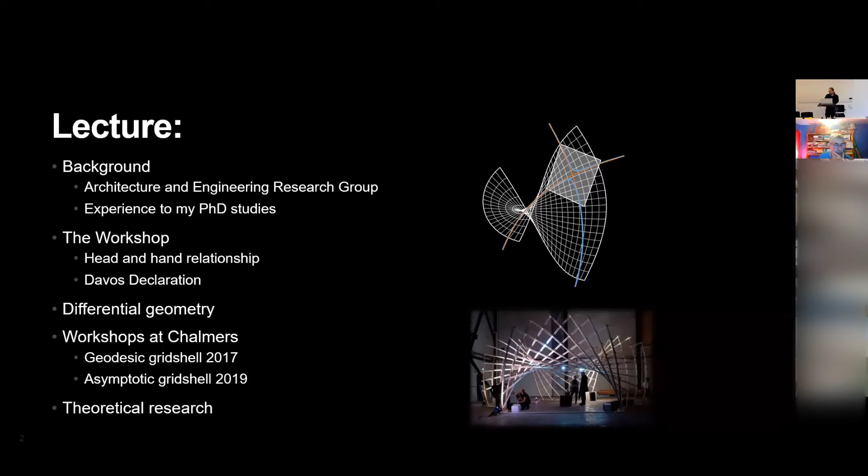So, part of the architecture and engineering research group here at Chalmers, it's a group consisting of architects, engineers, and also Peter, who is actually an artist. So it's really this mixed group of knowledge and cultures, in a sense. And as Allan said, Chris Williams is my main supervisor, and I also have Mats Ander and Claes Mondin as my co-supervisors.

Geometry is a very big part of our group. We've been host of Smart Geometry in 2016, and also the Advances in Architectural Geometry, AAG, in 2018. As you probably know at this stage, Chris Williams worked with Ian Liddell, for instance, on the Mannheim Multihalle a couple of years ago, and is also known for the British Museum Court Roof. So there's a lot about the connection between geometry and structural behavior and so on.

The reason I started to become interested in this was I did an internship at Buro Happold between my bachelor's and my master's, in the Smart Solutions group at that time.

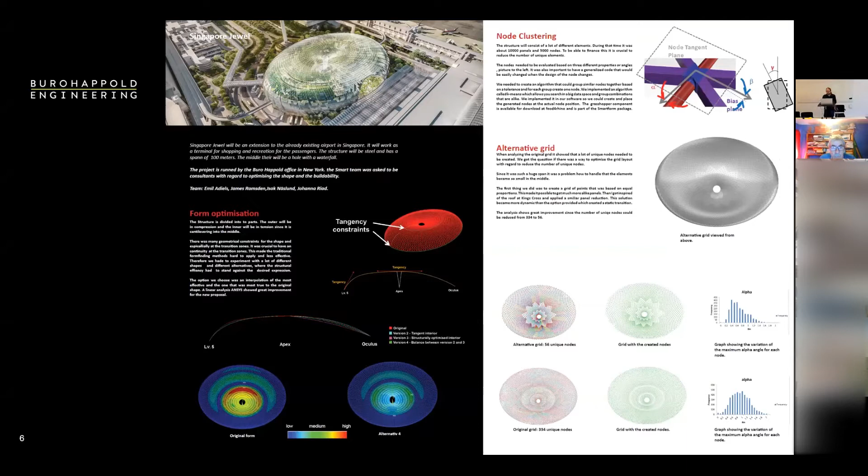So we worked a lot with geometry and projects like the Singapore Jewel. It was form optimization and also about fabrication or production, developing little tools like node clustering, together with other people like Isak and Emma Poulsen, which you will see more in the workshops later.

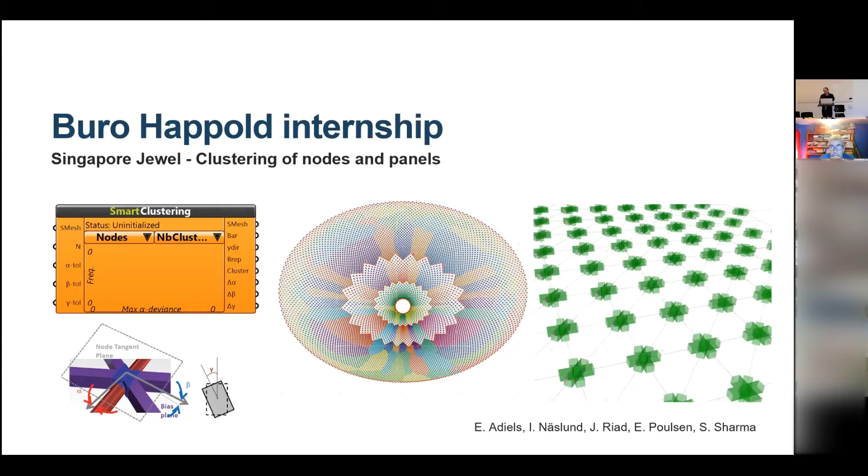There I became interested in the connection between form and patterns and forces, though I didn't fully get everything at that time, and I'm still trying to learn all that. I think it was through these kinds of projects I became interested to continue with that when I came back to Chalmers for my master's. That was an important period, or year.

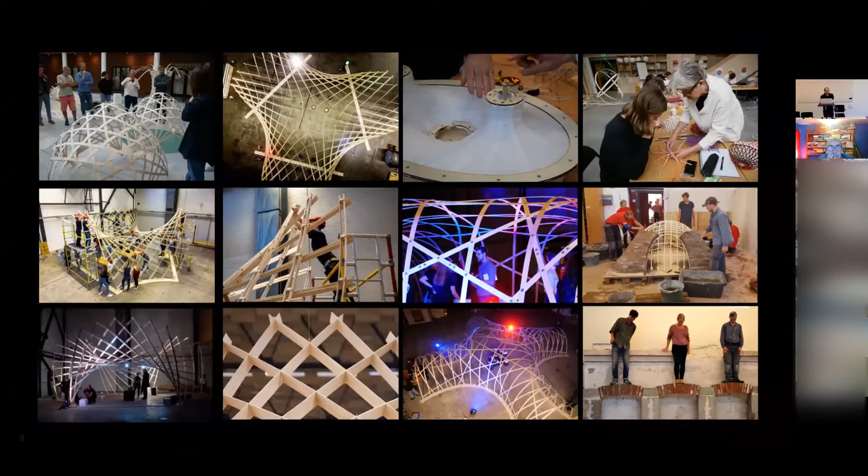The main thing I'm going to talk about is these kinds of workshops. What I mean by that, since it can have many meanings, is when you have a certain amount of time where you meet, have some sort of objective, and try to combine both digital modeling and building things, smaller or bigger models. I'll focus on that later, on the kind of design process we've been doing, because I'm not an expert in design process, but maybe showing how we've been doing it can be interesting to you.

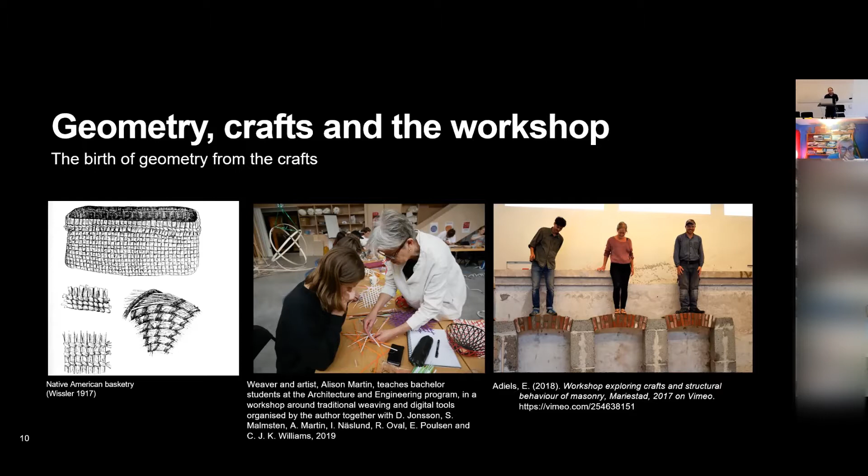But really, what's the connection between geometry and the workshop? It's difficult, but many do believe, and I can also believe, that geometry comes from the crafts. If you think about a weaver or bricklayer, the form and pattern is very much related for structural reasons, and that was probably more evident for craftsmen and craftswomen before we could have the math or theory to describe it, because that's only from about 300-400 years ago that we started talking about the kind of theory we have today. So there's a great connection there.

And also when we talk about these workshops, it's about the head and hands relationship, which has been very important. I can really recommend this book, The Hand by Frank Wilson, who I think is a neurologist, which tries to describe this marriage between the head and the hand, how it's actually very important for our learning historically, and how we are biologically trained to work with both the hand and the head.

There are different types of books I can recommend if you want to read more about craftsmanship, and also about the workshops, like Richard Sennett's, describing how we have been learning in the workshop, not least by learning from each other. All these books could be interesting to understand this. The second book, Together, is maybe even more important today when we sit so isolated at home and so on.

All this about craftsmanship is also related to the Davos Declaration. Not many people have heard about it, but it's a declaration signed by the EU Ministers of Culture, trying to produce documents defining sustainable building culture, where they focus on the process and a holistic view of the design and design process and its effects, also emphasizing craftsmanship - not that it should be conservative, but the connection between local knowledge and new digital tools.

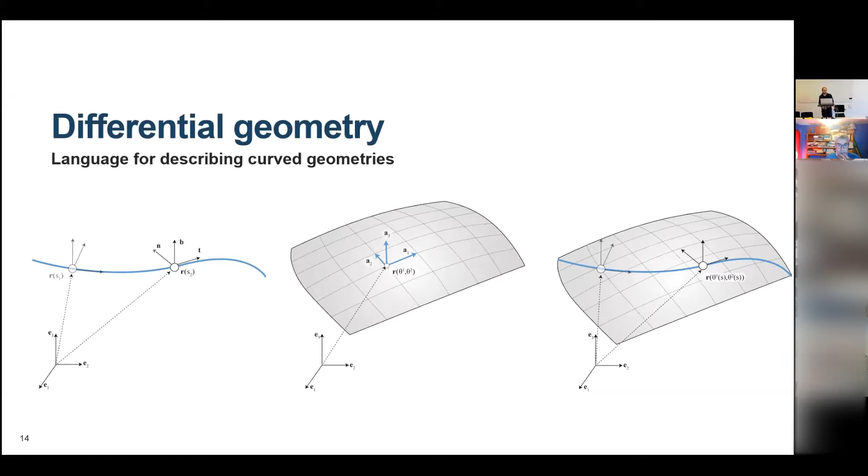Differential geometry is basically a language for describing curved geometries, at least the way I use it. You can basically say it's about describing space curves, surfaces, and then also curves on surfaces.

Space curves, you get this coordinate system where you have the tangent, which you probably know, but also the curve normal and the binormal. You can use this to describe different properties of the curve: the curvature, which is kappa, and the torsion, which is tau. That's really useful when you try to understand the properties of these curves.

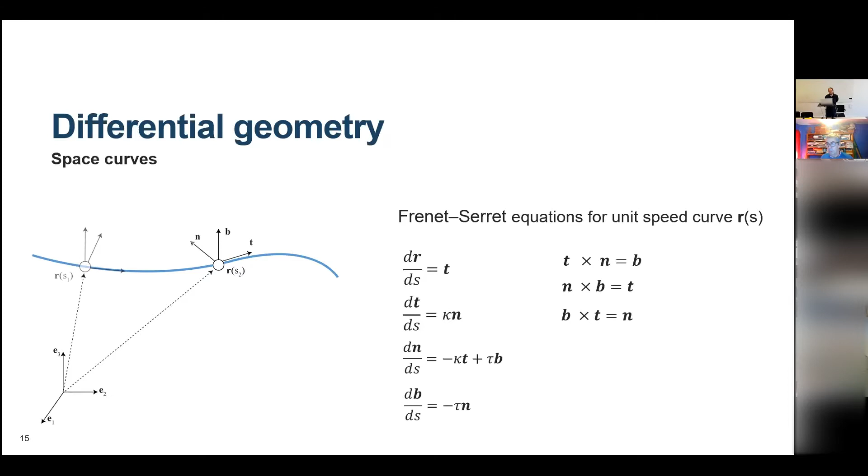The same thing can be done for surfaces. It gets a bit more complicated when working with surfaces, obviously. The difficult thing with working on curved surfaces is that the base vectors, your coordinate system, continuously change. So that's A1 and A2, which are in the plane of the surface, and A3, which is normal.

But we can use this to also describe the properties of these surfaces. So the metric tensor describes the lengths and angles in this grid that you see. And the B alpha beta are the components of the normal curvature tensor, which is how much this bends in relation to the normal to the surface. You can basically use this to describe the pattern.

You might think you could decide this however you want, but you can't, unfortunately, because you have the Gauss-Codazzi equations, which are three equations that describe - it's basically a compatibility equation, making everything, how the A's and the B's actually fit together, so it actually becomes a surface in the end.

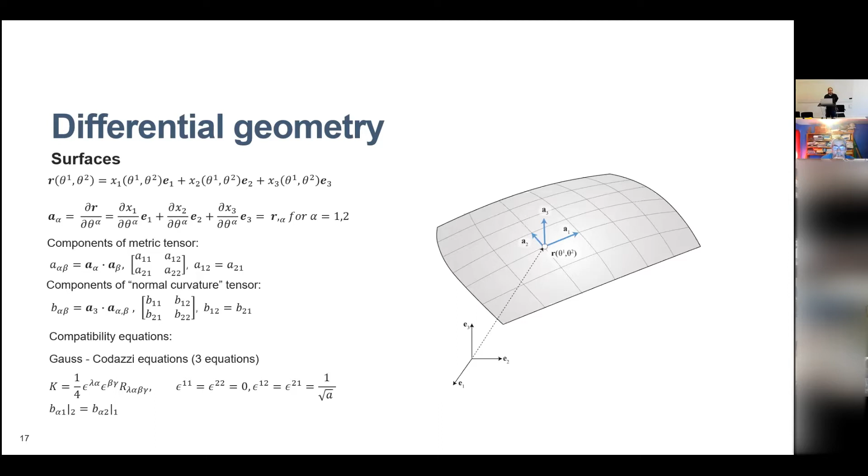The first one, the Gauss equation, is basically describing if you would actually walk on a surface. So it's describing the intrinsic property - basically if you lived on this surface, you could know that you live on a curved surface, without seeing it.

If you would point in a direction and walk with this vector in the same direction, and then come back at the same point, you would basically have an angle, and then you would know that you live on a curved surface without actually seeing it.

And the last one, with the B alpha and the covariant derivative, is the Codazzi equation, which also has to do with everything fitting together. So these are the main equations that you need to at least know about when working with these kinds of things.

What is really important then - you've probably heard about the Gaussian curvature. There are many different types of curvature, but the Gaussian curvature is a measure of surface curvature.

We can describe different properties: if it's positive, that's due to having two positive principal curvatures, you could say - that's K1 and K2, and I'll come to that. But you can also describe it with B11, B alpha beta, and A alpha beta. That's how they connect.

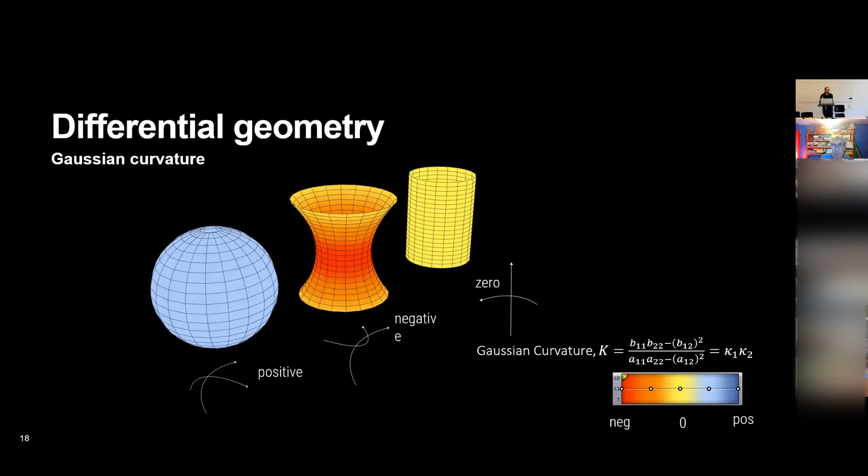The more Gaussian curvature, the more difficult it would be to build something. Usually if you have a gridding problem, you want a low Gaussian curvature in a sense. But for structural reasons, it could be really good to have more curvature.

The principal curvatures are the maximum curvature in the normal direction. So if you think about the normal and how much each of these curves, that's the direction you would know - it's in a sense related to principal stresses, but it only has to do with the normal. So when we have curves on surfaces, we can always relate them to the surface normal.

If we take these principal curvatures and add them together, divided by 2, we get the mean curvature. And if you have zero mean curvature, then it's a minimal surface.

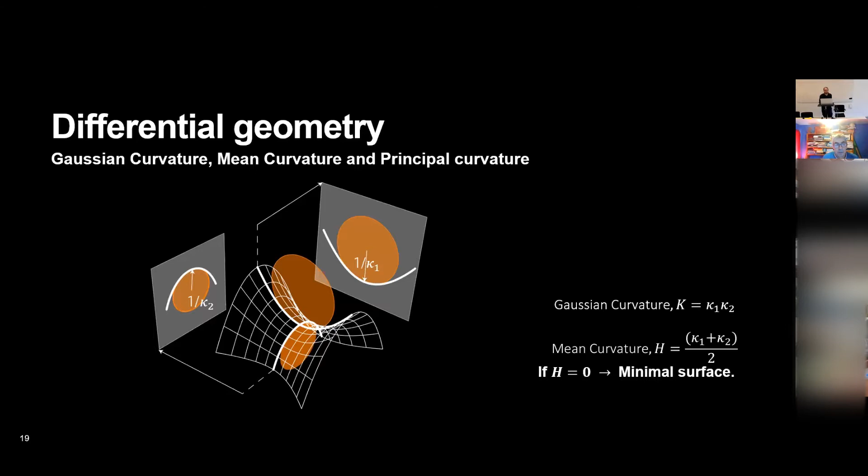So why is this good to know? We can use an example. If you see this Enneper surface, it has this description. Using all the equations we saw previously, we can calculate the A11s, A22, A12, and the Bs. You can see that you have zero mean curvature, the B12 is zero, and the A12 is zero. So basically you know you have a principal curvature parameterization. It's a minimal surface, so you know all these angles are at 90 degrees, and you also know that you have flat panels everywhere.

So it could be good to know about a way to describe these surfaces.

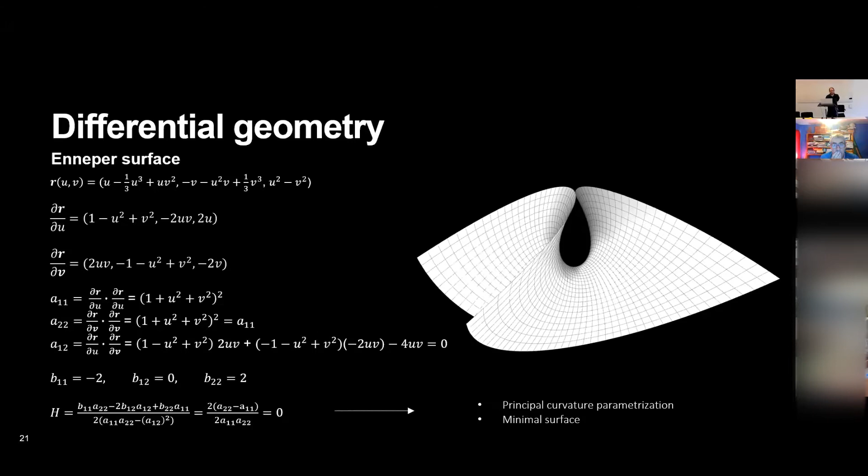But we also have curves on surfaces, and similar to the principal curvature directions, we relate its curvature to the surface. The equations I showed previously about curvature, when on the surface, can actually be divided into what is called the normal curvature and the geodesic curvature. The geodesic curvature is when it bends in the surface plane, and the normal curvature is when you project the curvature vector onto the normal and see how much component there is.

If you have zero geodesic curvature, then you would have a geodesic. That's a special type of curve that only bends in relation to the normal, and it's also locally, at least, the shortest distance between two points. So you can see it in both ways.

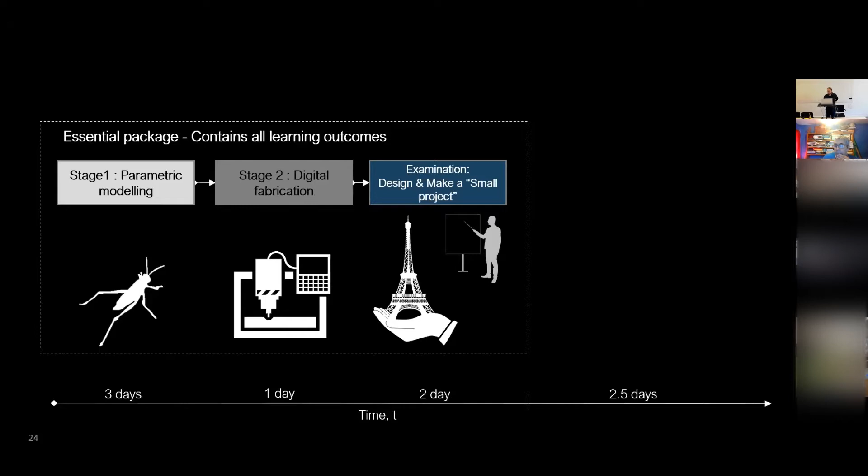That's all fine, but we wondered what happens when you get a bigger project—you can't really build it on your desk. You have to think about dividing all the pieces, the erection process, the production process, and so on. So we thought, why not have a workshop to summarize this, since we managed to fit all the requirements into 6 packed days.

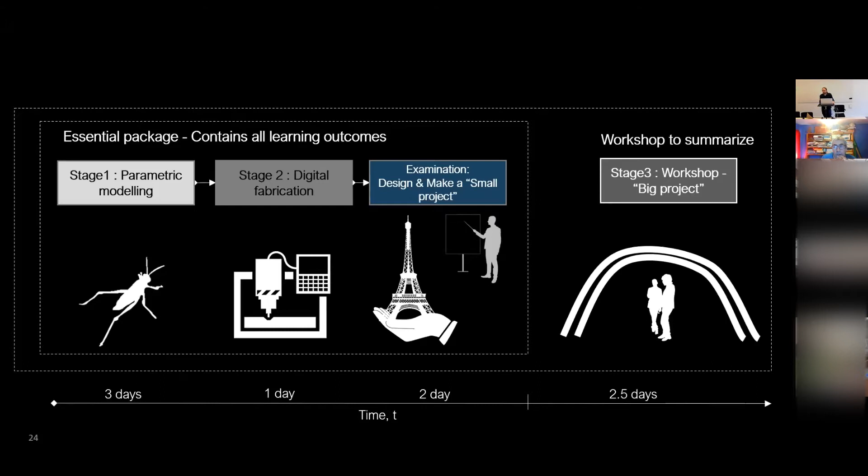So we basically had 2.5 days to do something fun and be a bit free. We thought about it—we know we want to do a space in December, so not outdoors, we want an indoor pavilion of some sort. It's going to be a space for this Christmas holiday event, where they have a book release and so on. So we thought about what kind of things we'd like to incorporate.

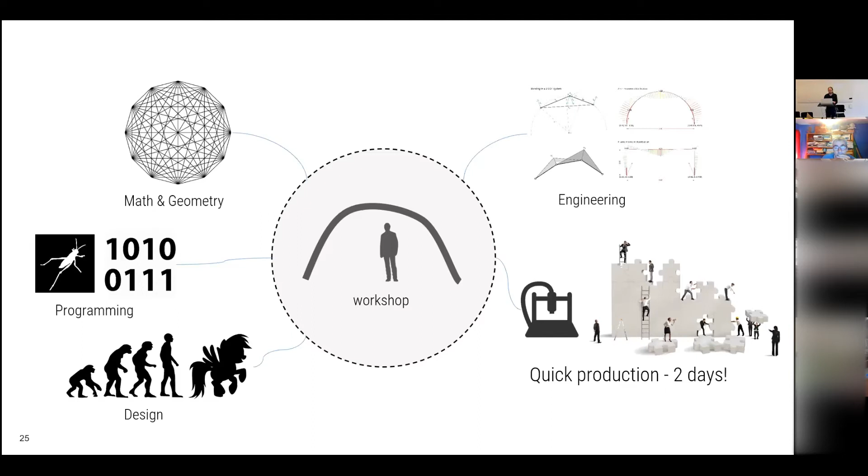We wanted to relate it back to the course, the kind of programming work we'd been doing, with some nice design since they study architecture too. But mainly, we had to produce everything in just 2 days with our students, from boards coming in to having some sort of structure. We don't have a great budget—we could only get a certain amount of plywood boards, screws, and a limited number of tools. So cutting them into straight flats was the most economical way, which meant we had to keep things simple.

We had these limitations, but still had to make something exciting. The methodology we used was to think about different geometrical concepts and then go into a design process where, as a team, we considered the form, the space, the limitations, the manufacturing process, analysis, and so on. Then we moved into producing everything and ran the experiments with our students.

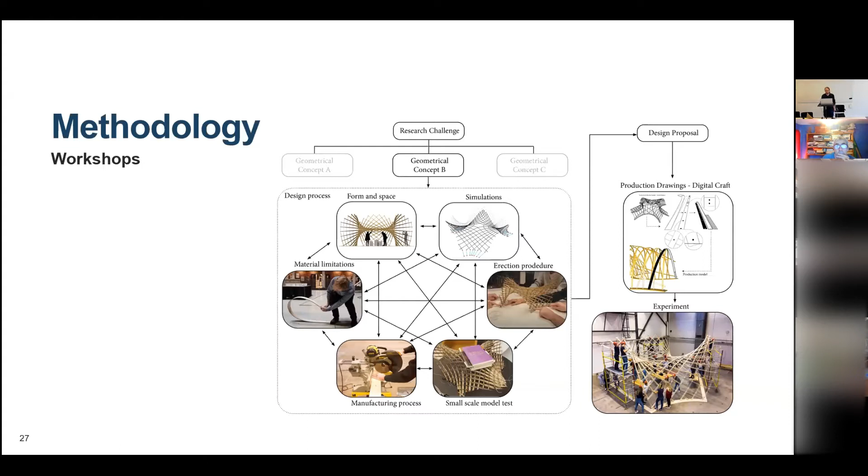This is the couple of people who have been involved, so it's not only me that has been doing this. It's me and Isaac Näslund, who was the teacher. I'm the course responsible, but Isaac was also a teacher. It's basically a design team that's been different people different years, and we try to actually package it so the students understand what we're doing, not just something they don't really understand. We try to make it into some theory and application so they can learn from it.

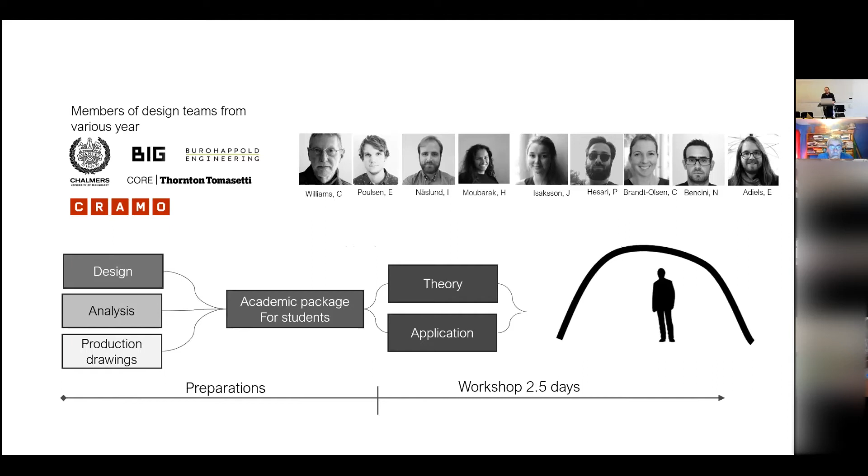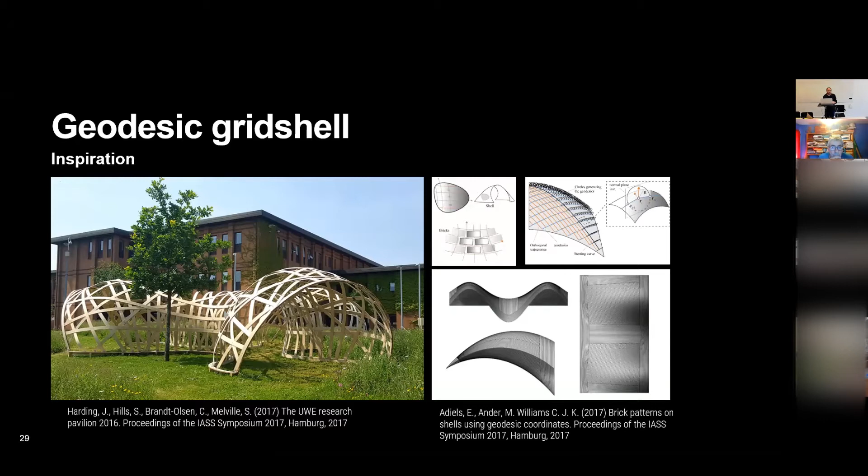The first year was inspired by different projects like this geodesic gridshell one, and we had worked a bit with geodesics on a paper we did, so we knew a bit about that. That's why we thought it would be good.

Going back to these geodesics, there are different ways to think about it. You can think about it as having 2 fixed points, and you find the closest path between them—imagine a rubber band or a cord tightened between these 2 points, you get the closest distance. Or you can think about having a piece of tape or ribbon that you start in one starting point and direction, then you see where this goes. That's thinking about it as having zero geodesic curvature in a sense.

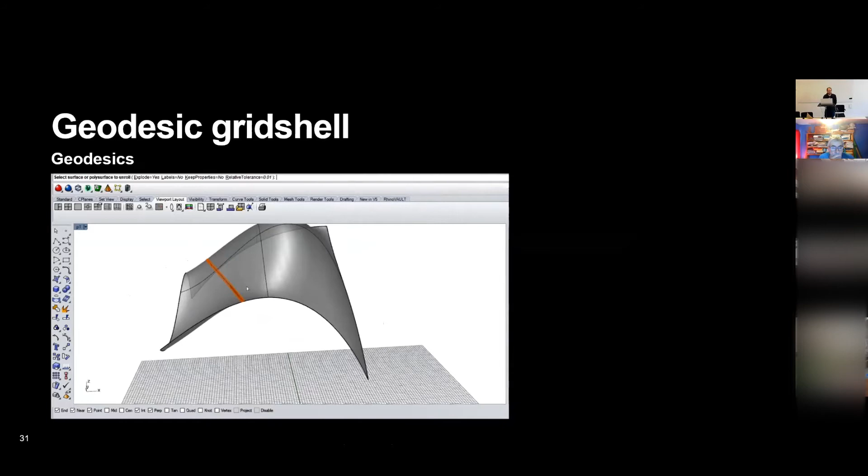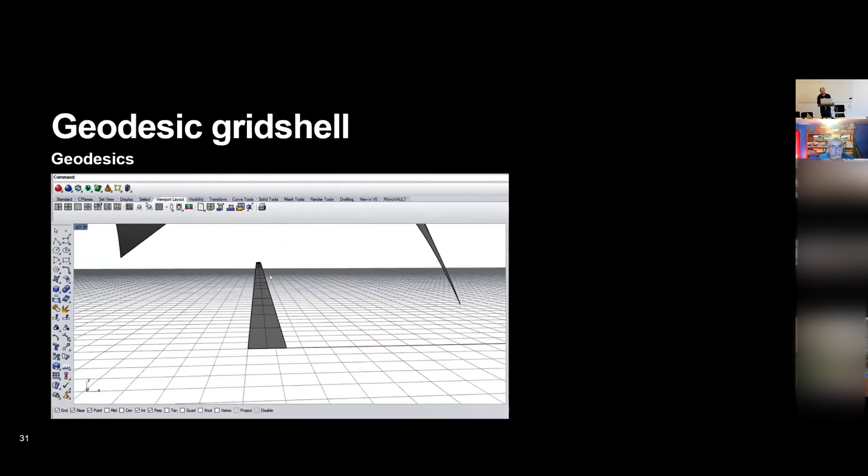Every time we have a theory or something like that, we test it out. You probably learned Rhino now or something like that—just implement it, some sort of script, then check. So yeah, that looks pretty straight, that seems to be working, that's good, let's go with this.

Then it's also about understanding the limitations—how much can we bend this, how much can we twist it, how are we going to do the connections, and so on. So basically starting by just building random stuff, and you check, oh this is tight, we can do it. So we know that.

Then we went into seeing what kind of shapes, because it's going to be a space, right? So we did some options, but we found out that it didn't really work because we didn't know how to design it, build it in a sense. It wouldn't really work because we're only working with mathematical surfaces—it's not actually real, so you have to always think about that. It's going to be a real structure, some things will happen.

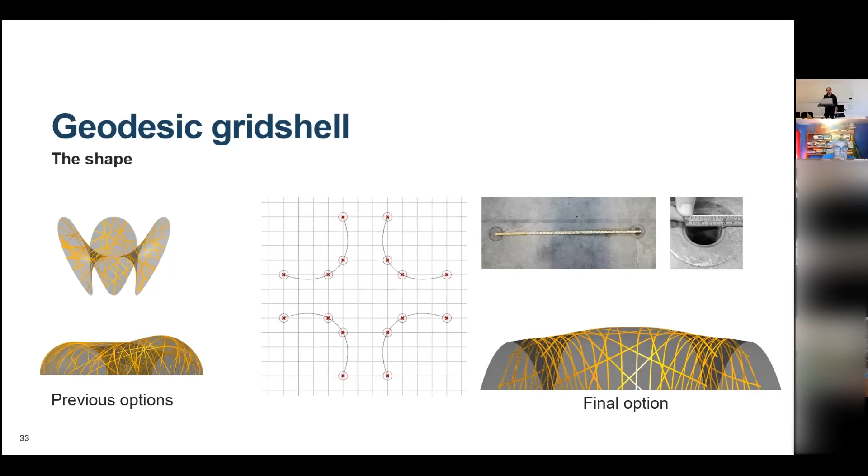We actually realized symmetry would be really nice, and we had this floor where we're going to build it with a 1 by 1 meter grid. So we just took the base kind of curve, and we tried to match it at these points and found the surface that worked that way.

The good thing about geodesics, as you know, is you can decide how the pattern is going to be, depending on the starting point and direction. We tried to find something that would look interesting but still have a lot of symmetry—I think every element here is repeated 8 times, which helps speed up the process a lot during the workshop.

We could also think about the erection sequence in the meantime—what kind of things should we start with. They can start from 4 different points and come to the middle. We really try to imagine the workshop beforehand, in your computer, before you're there.

We did everything in Grasshopper—it's not very pretty here, I'm sorry, it's an old picture, but just to show that we did everything so that the students would get the script and could basically build it themselves, going into all the things we've been doing as teachers in the design process.

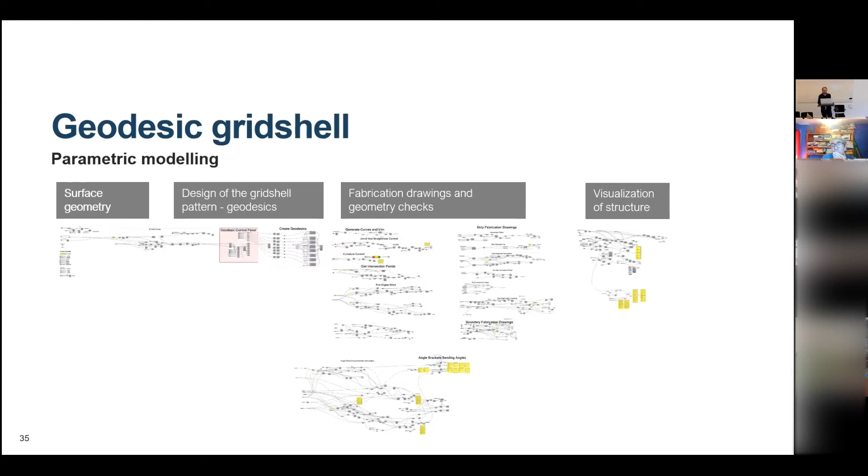A lot of it is just fabrication drawings and geometry checks. So we could basically tell the students, in your small projects, you could stop at the design of the gridshell, the geodesics, but everything else is used for checking, doing all the fabrication drawings.

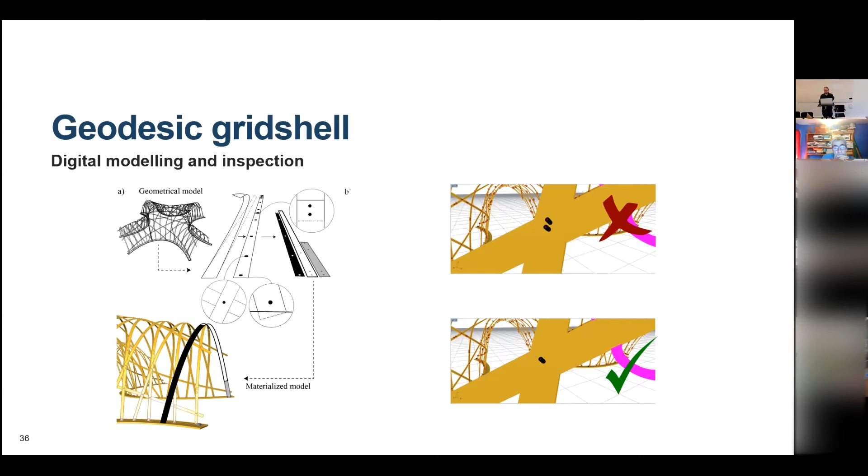The way we did it was we first did this geometrical model, and then unrolled all the laths and did all the holes and all the cutting, and divided them up, and then built it up again. The advantage was that you could check these kind of things. Since every lath has its own bolts, we could see if they didn't match, there was something wrong, so we could basically use it as a way to check beforehand that everything would fit together.

And these were all the drawings that we did. It's all the laths, for the laths, since we had to repeat it 8 times. And that's for the boundary. We only needed one CNC to run it, which saved time.

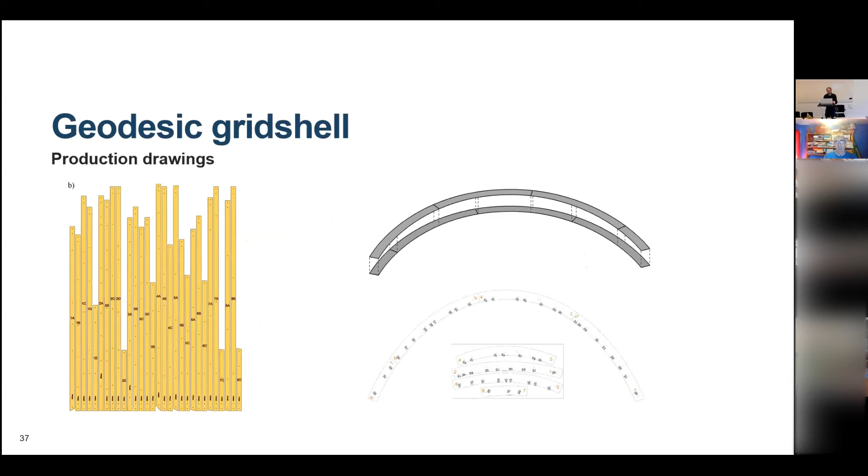We were very confident, from when we did the bending test, that everything would work. We could bend it quite a lot, but Emil Paulsen did actually a bit of a quick analysis beforehand, because we were kind of stressed at this point as well, since we maybe had like one week to prepare this. We were like, yeah, it's fine, but we actually realized we overutilized it a bit. We kind of thought we'll be fine, it's not that big of a curvature, but we'll see - we might regret this.

And now you will see the workshop, how it went, from these 2 days.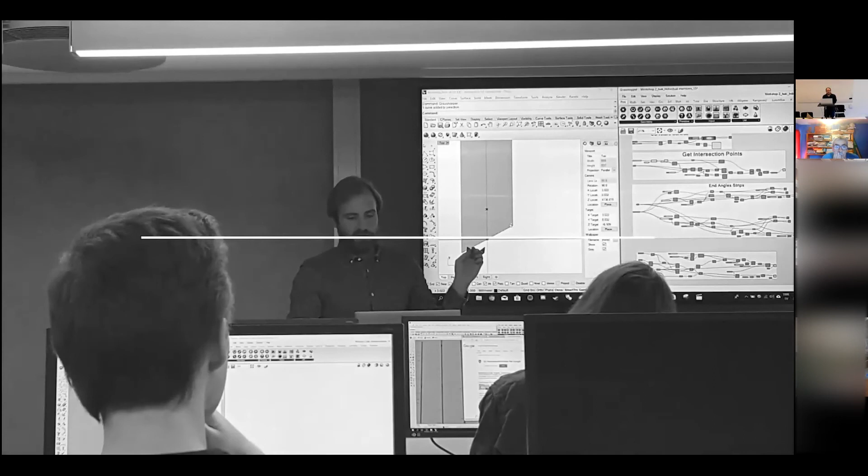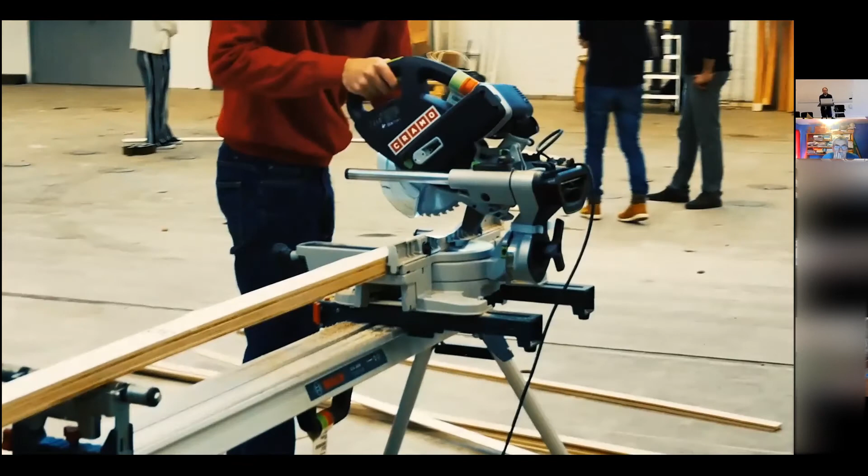So this is Isaac showing the students the scripts. Now they cut up the boards, they come as 6mm plywood, and these are the paper templates that we printed out, and they had to use them. We have, didn't mention it, but we have like 40 students.

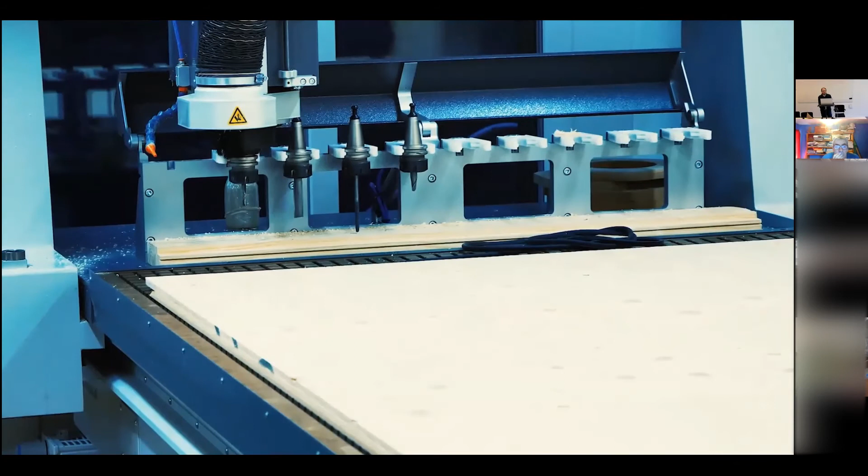So the fastest way was actually using all these simple tools. We could have done it with the CNC, obviously, but we wouldn't have had time. But we made the base plates there, like you see here. And marking is good.

You can kind of see this teamwork, getting together, and a lot of dancing and stuff like that. They had the music on during the day, and that's also one thing that's important - to have fun during these workshops.

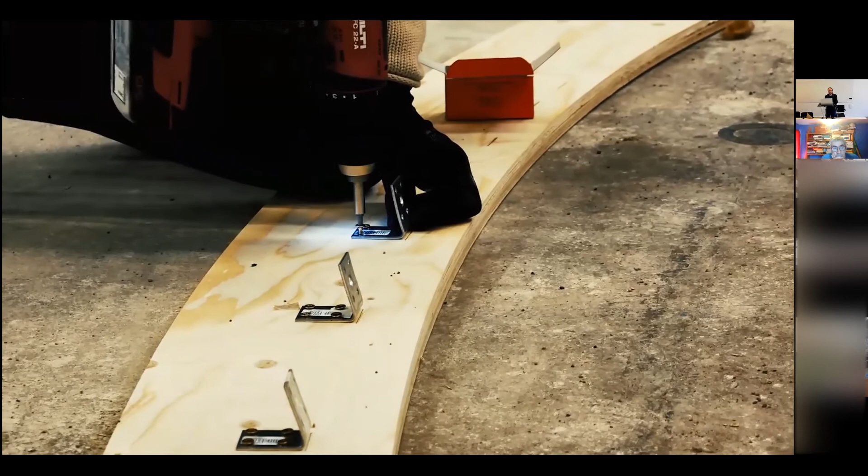Then it was assembly time. We actually pre-drilled all the holes, and we were a bit stupid because we had the exact diameter of the drill and the bolts, so we didn't have any tolerance, which was just stupid. I had to apply some force sometimes to get it together.

And here you can see the teamwork, more dancing. Time lapse. I think it's really important to see that they're having fun.

We were a bit skeptical - we were afraid that they would find it really boring since we had done so much in advance, but everyone actually got different assignments. We didn't tell them how to do things, so they actually divided themselves up and so on. We gave them the freedom to solve the issues themselves from the drawings and so on. So it became, I think, a collective ownership in the end, which was our intention. It was not our thing, it was everyone who was involved.

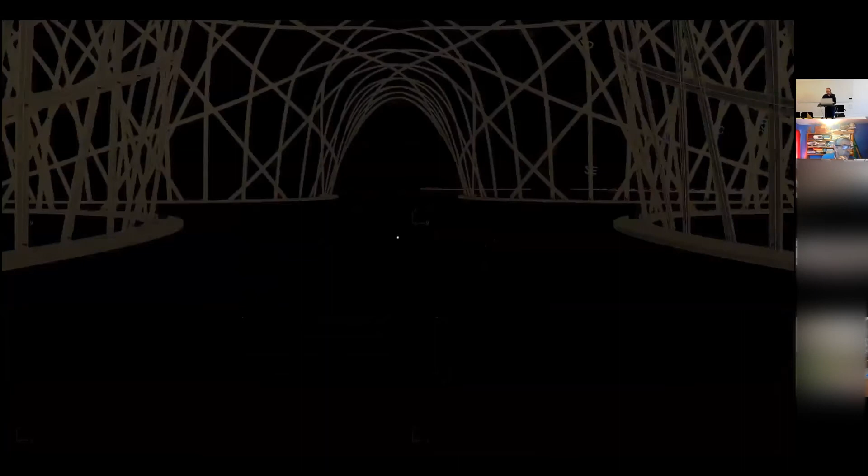We also got a bit of breakage at one point, since I think we had a knot in one place and so on, but overall I think it looked really nice. I think we managed to get it to look quite natural - that's the result in the end, and the details worked pretty nice.

But then we were in the same situation the year after, and the year after that. So this is 2019, and we were still thinking about what to do. Do you want to do the same thing? That's a bit boring. So I'm going to talk about this asymptotic gridshell instead.

And the inspiration came from Eike Schling and Jonas Schikore, who did this pavilion. And we also did a previous one in 2018, which for some reasons you will see had some issues.

There's a bit of difference and some relation between the asymptotics and the geodesics. The asymptotics, I think the name comes from two curves that don't really meet. You might remember this from math. If you took a plane and intersected the surface, you would get these blue lines and they wouldn't really meet. But if you get closer and closer, trying to touch it with a smaller part, you'd get this orange line, which is almost touching, but not really. That's an approximation of the asymptotic directions.

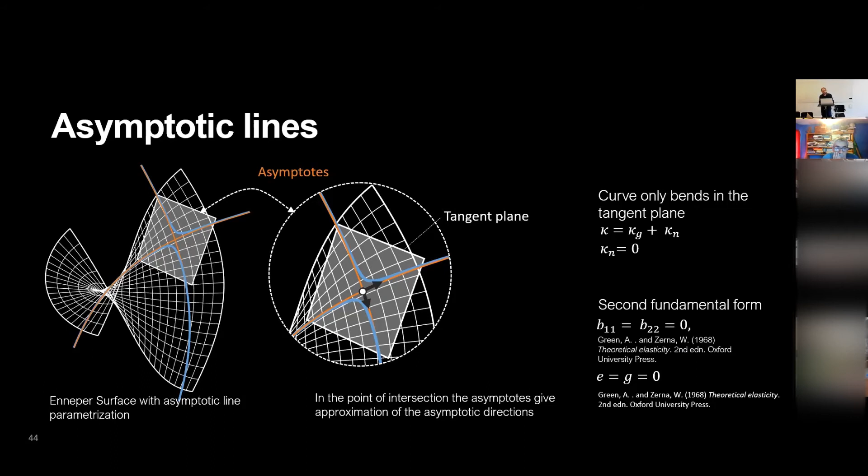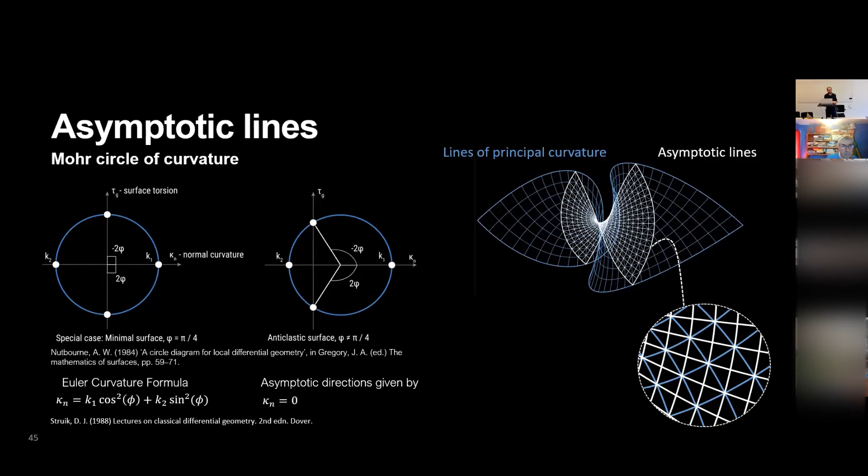You can think about using the Mohr circle of curvature, which is kind of the same as the Mohr circle of stress, to see how these principal directions are related to the asymptotic directions. You can see that you have to have a surface with both positive and negative, so it actually has negative Gaussian curvature. And if you have a minimal surface, this direction will be at 45 degrees against the principal curvature net. That's pretty useful to know.

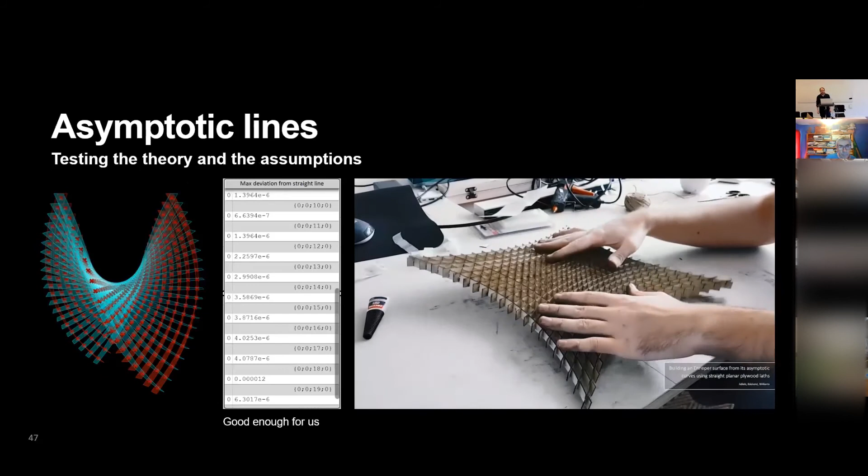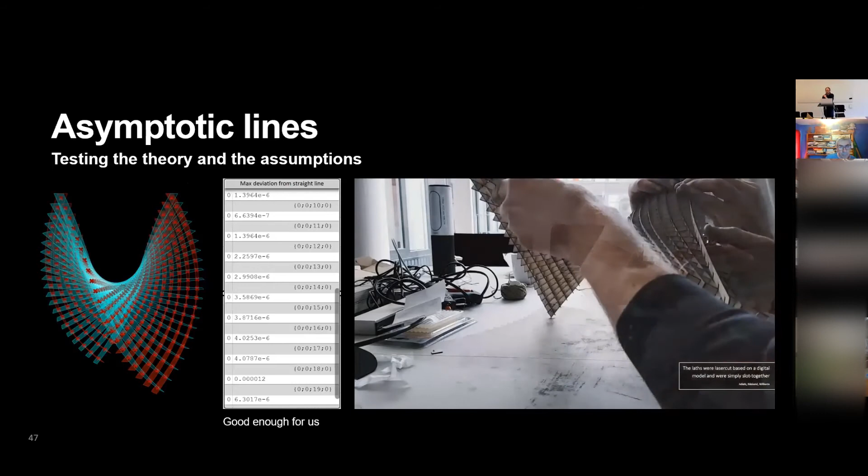If you extrude these curves in the normal direction, you get an approximation of something that could be unrolled straight, like the geodesics. It's not exactly true, but we built a model to test it out, and it was basically good enough for us. So that's kind of the idea usually: we find a theory, implement it digitally, and build a model to check it out.

The idea for the shape was related to the erection procedure, similar to the Mannheim one, trying to see if we could find a shape we could build flat and just push up. We tried to find ways to simulate it, but it didn't become as accurate as the physical model. So we basically relied on the physical model to understand if it would work at big scale.

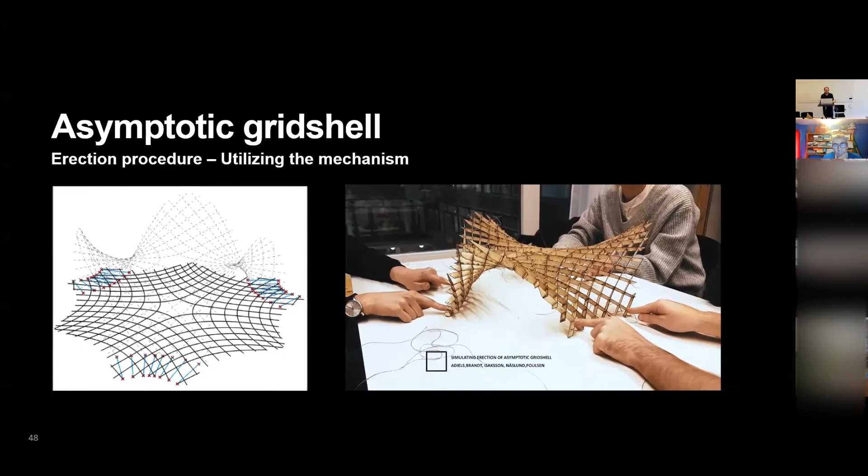The good thing about utilizing the mechanism is that it's good for the erection procedure, but as we saw, you have to obviously lock the mechanism once you've erected it. We didn't really find the time to develop, with the tools we had, a way to solve any bracing. But we had different models to test the overall stability.

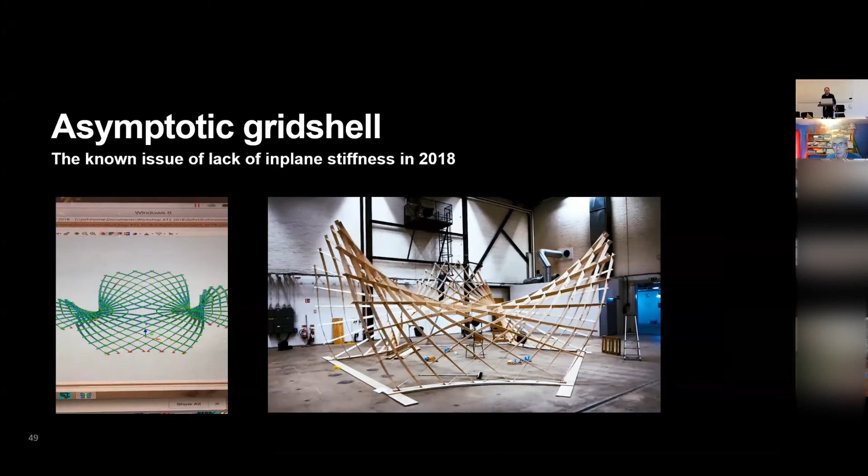This is basically me and Isaac. He's standing on this ladder trying to simulate this modal analysis. And I'm taking the important job as the cameraman, of course.

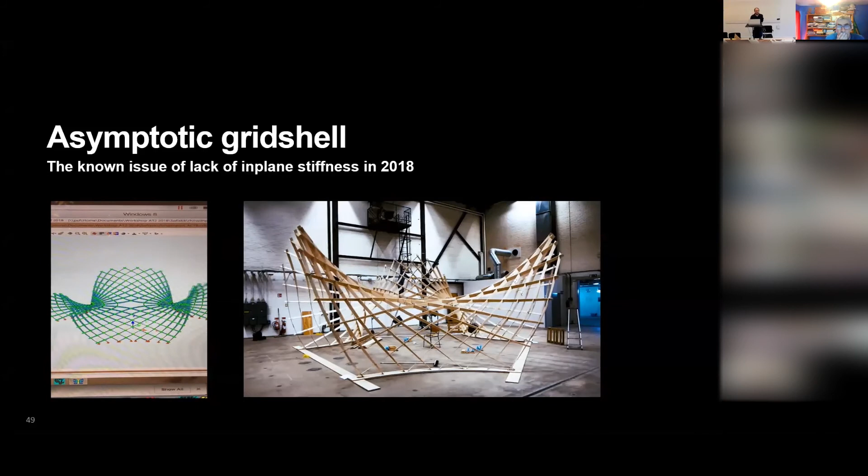So we tried to develop a new detail where you can actually lock it. We had a double layer which we could then lock with this lock. But it also caused some problems for us, because it needs to slide against each other, from when you have it flat, as you probably talked about in the Mannheim case. And when it's flat, it's not really 90 degrees anymore because it's flat. So there's all these kinds of issues.

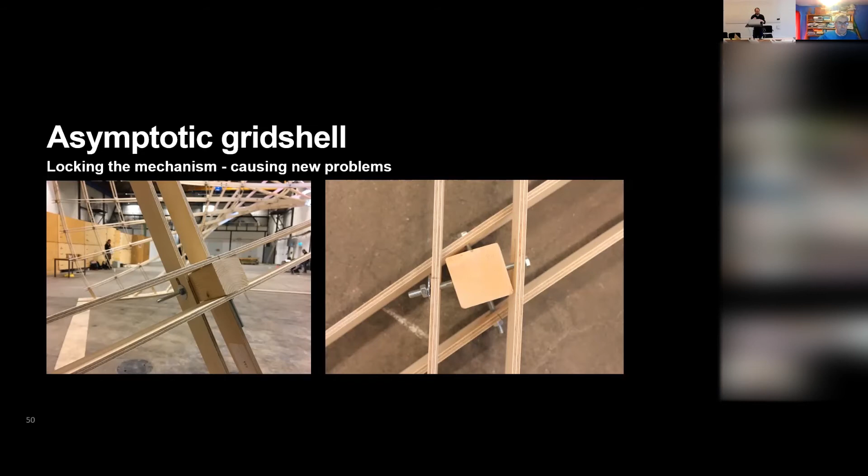We had to find some way to produce it very fast, because we needed some sort of slots in the middle. So we talked with the people in the wood workshop to help us out, and they suggested we could use this tool. We built this sort of workstation, and then we were pretty confident we could probably build these in one day's time.

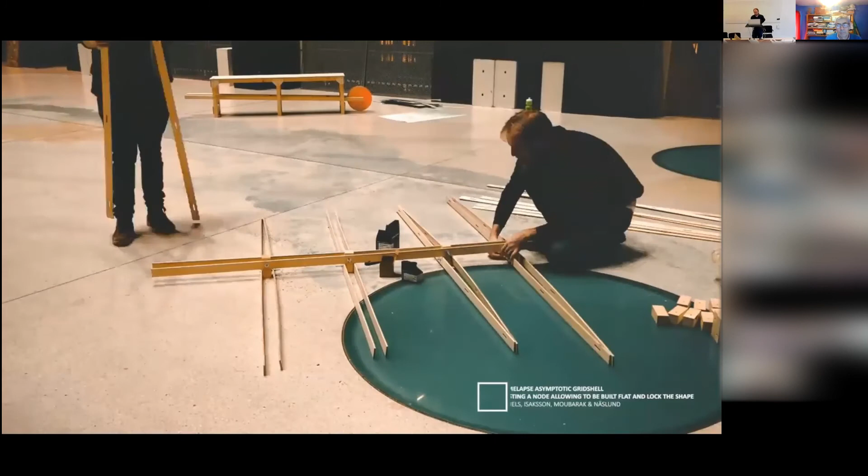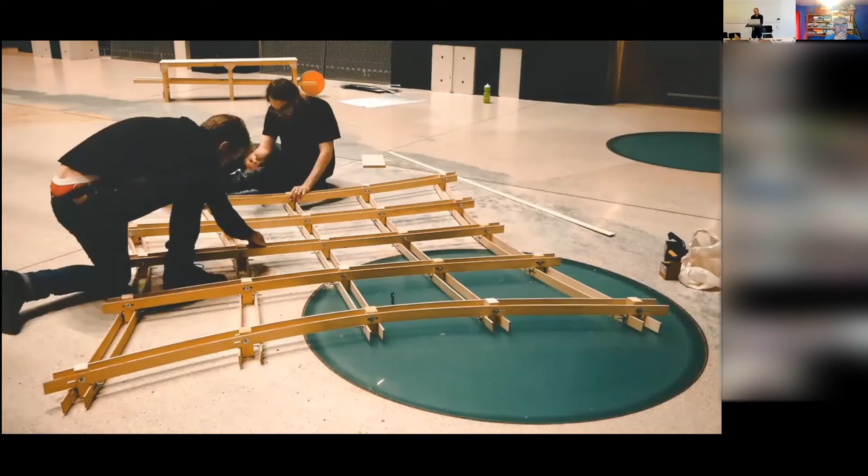But then we had to see if it actually worked. So we just built a little model, me and Isaac, to see, because it's kind of difficult to understand the kinematics and stuff, for me at least. We tried to model it accurately, spending a couple of hours just to see if the thing works. Now it's just locking it and trying to test. At this stage, we're kind of thinking this will work.

So we're happy. But it was a bit difficult, and maybe you'll stumble upon the same thing in your projects. So when we flattened it, we had to think about how these pieces would need to move and slide, and calculate the lengths needed to know the slots, the length of these slots, and how much it would move.

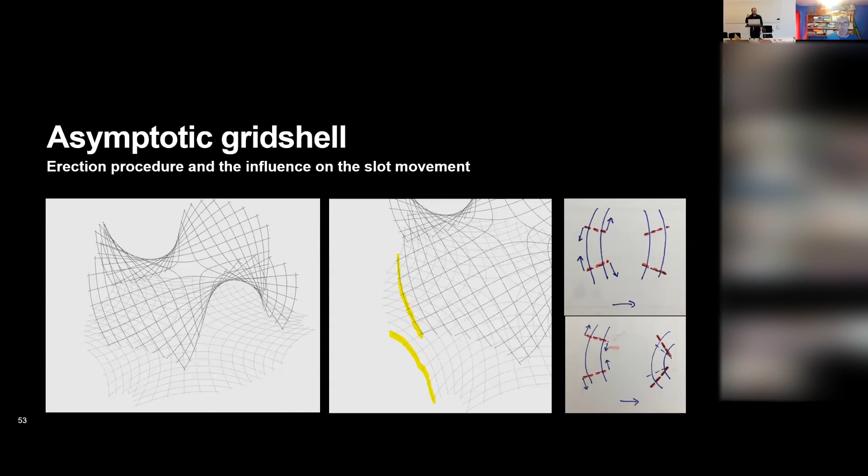But the problem sometimes was that when we flattened it, we had to understand the difference between the flat piece and how it would bend on the surface. Depending on that difference, sometimes it would look very strange, but intuitively that would be the right way when it would push up and so on.

Going back to do some calculations, Isaac worked to find the difference between the angles, and it's usually easiest for us to just try it out digitally. So once it works digitally, we can implement it on our structure.

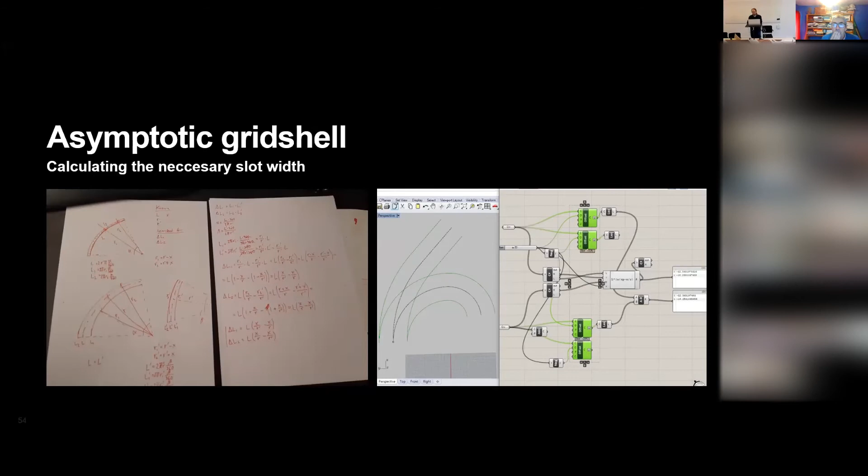But we also needed to think about whether it would be a problem when you squeeze it, whether the slots we built would need extra tolerance. It's really good to use digital tools to see if that would be a problem, since that's hard to think through otherwise. We used Rhino Grasshopper to confirm it wouldn't need any extra tolerance.

So then you just do some adjustments. What I found is that you think of it as small adjustments, but you usually have problems with the boundary conditions, getting the right distance.

Can someone put the screw here? Can we actually fit that when we push it together and so on?

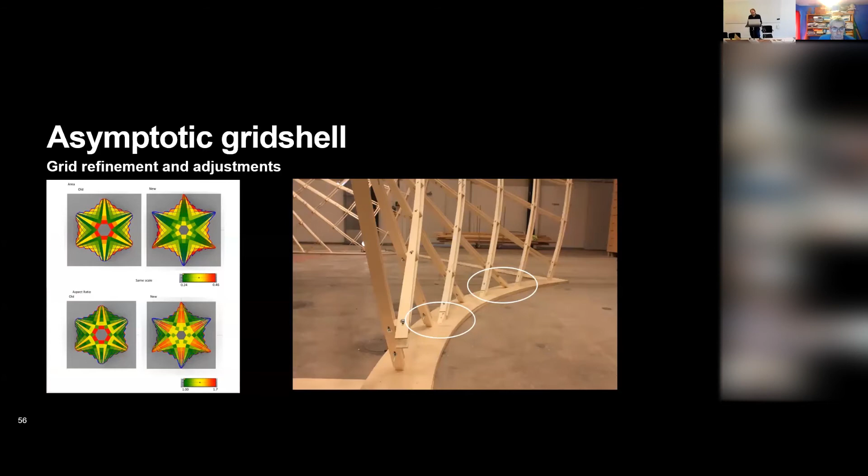In a sense, you can tilt it, you can rotate it. So I think of it more as trying to understand how to communicate, either with a computer or a person doing it. You just have to be creative and think about it - it's all about communication in a sense.

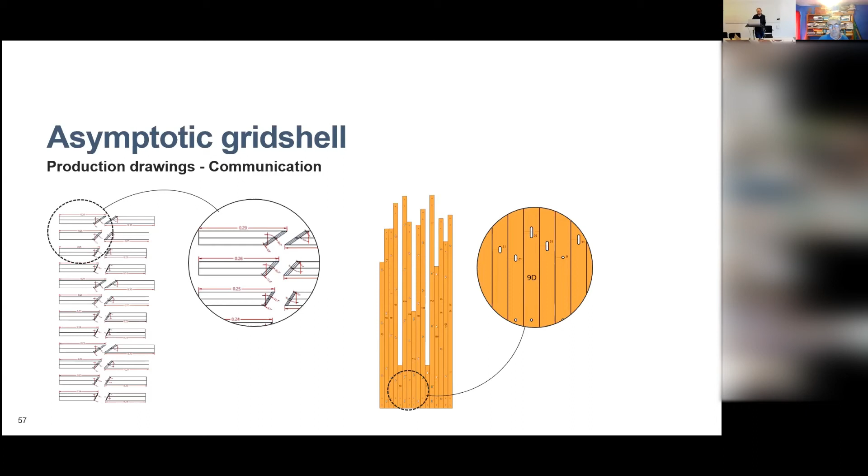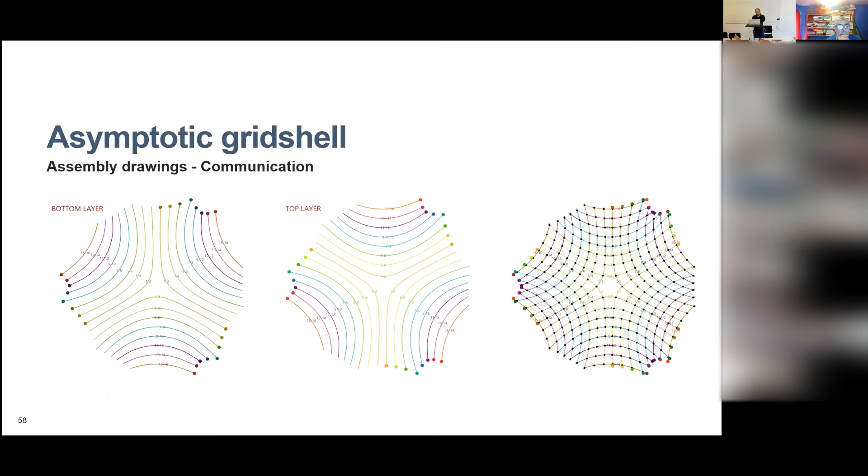But now for maybe the fun part - let's see how it went with the erection procedure. This is from the workshop.

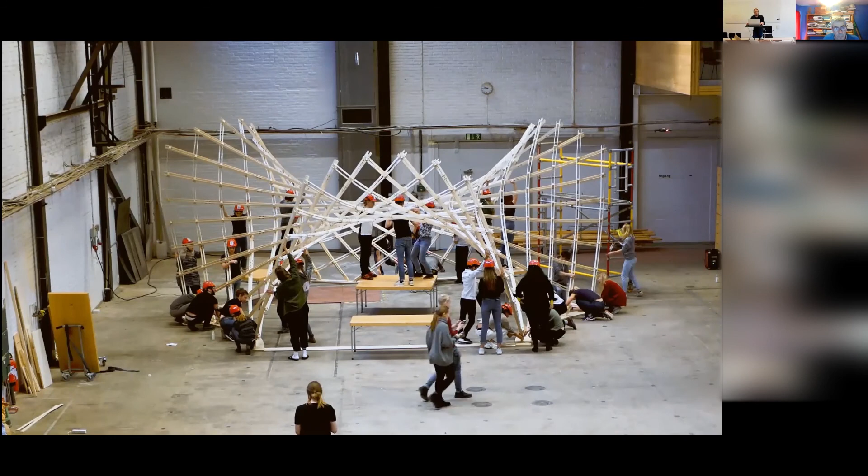And now they start to lock it into place.

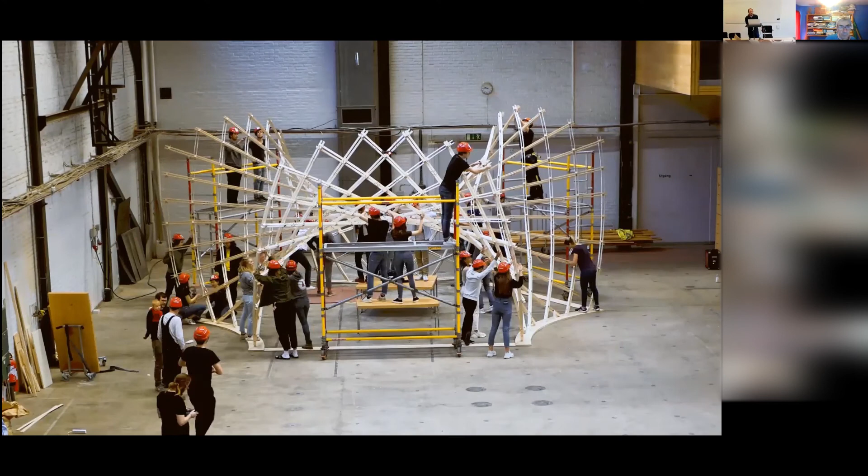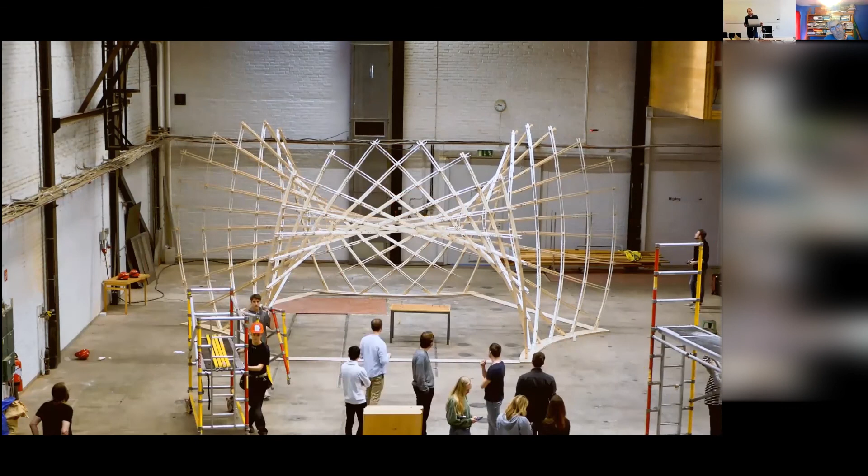And then we had to do some adjustments, because some students locked it before thinking it through - in a sense you need a better strategy to understand which one to do first. But you always think about that, and there's 30 students who just want to start doing things. So, I think it turned out pretty good.

And when we disassembled it, it actually just became this - we fitted all the laths onto two of these. So that was pretty nice.

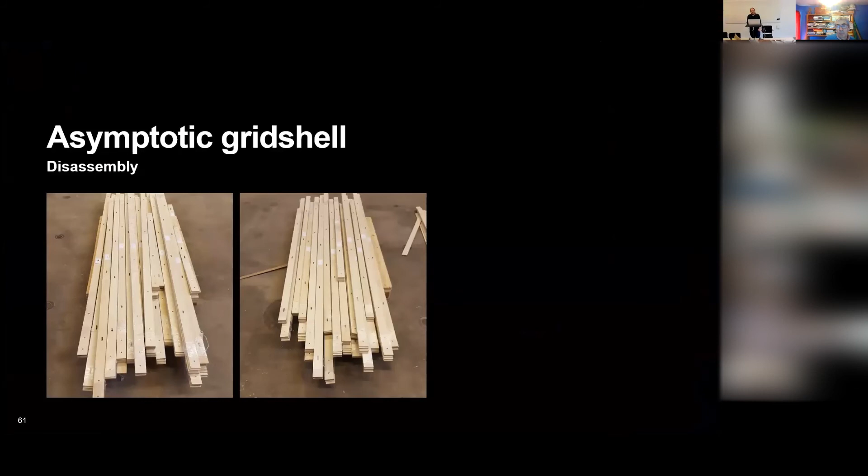All right, I thought I would talk a bit about some of the theoretical research. I don't know if I actually have time for that, Allan, but maybe I can do it quickly.

Yeah, that'd be great, Emil. Yeah, just quickly, okay, just show - yeah, great.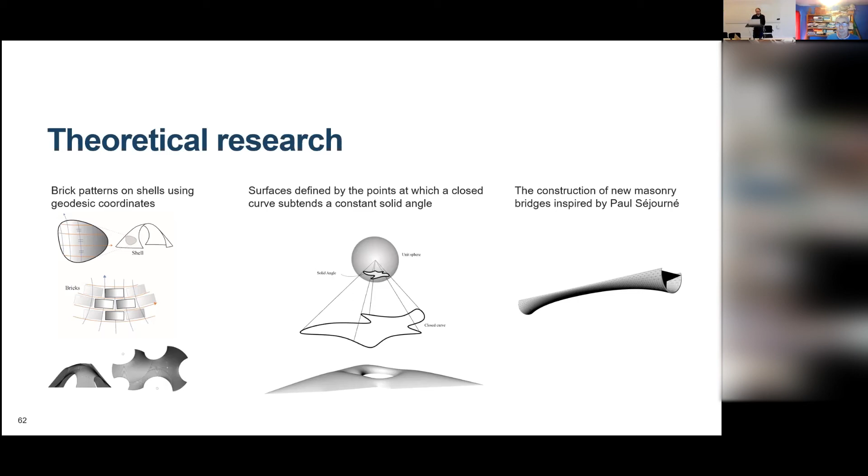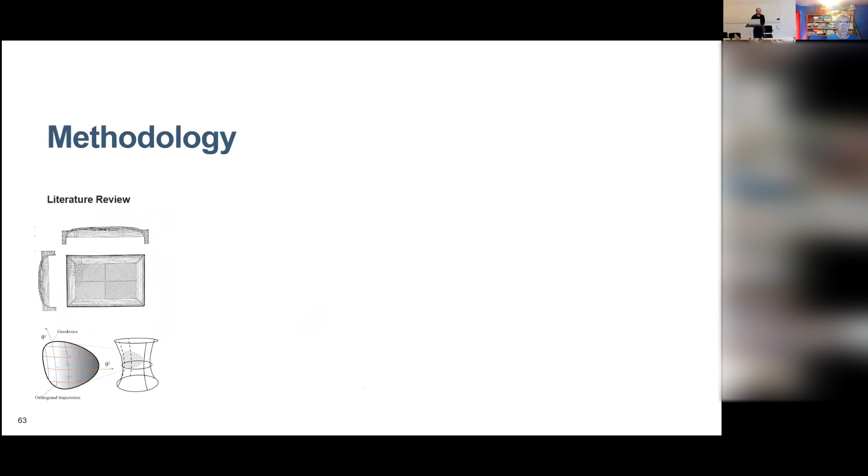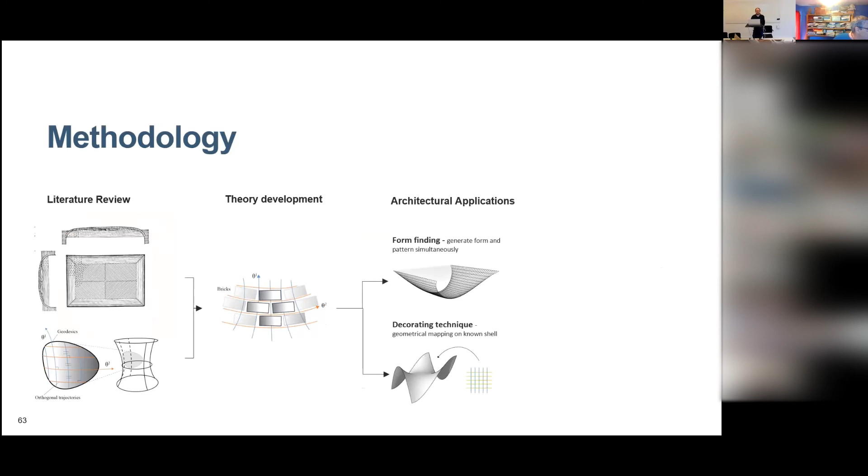Nice link, yeah, right. So I thought I could talk about three different things here, but maybe I'll just - this is more practical stuff we showed, but we'll also do some more theoretical stuff. And the methodology we'll use usually is to look in history, going back to Baukultur, the Davos Declaration, and see historical structures and link it to some math, then do some development and see architectural applications, then do some simulations.

One paper we did some time ago was on brick, to see if we could find a way to describe brick patterns. We basically looked at old drawings and saw that they only usually describe the bed joints. So is there any coordinate system on a surface that we could build, that we could apply like that?

So that was one thing we thought about. Then we also looked to see if we can link it to the membrane theory.

You remember you had the lengths and the angles, the A, alpha, beta, and then you had the normal curvature and planarity, the B's. You also have the normal and shear stresses from the general theory. So you can basically combine these three, but then you have to think about, you have three equations for the membrane shell, and three equations from the Gauss-Codazzi.

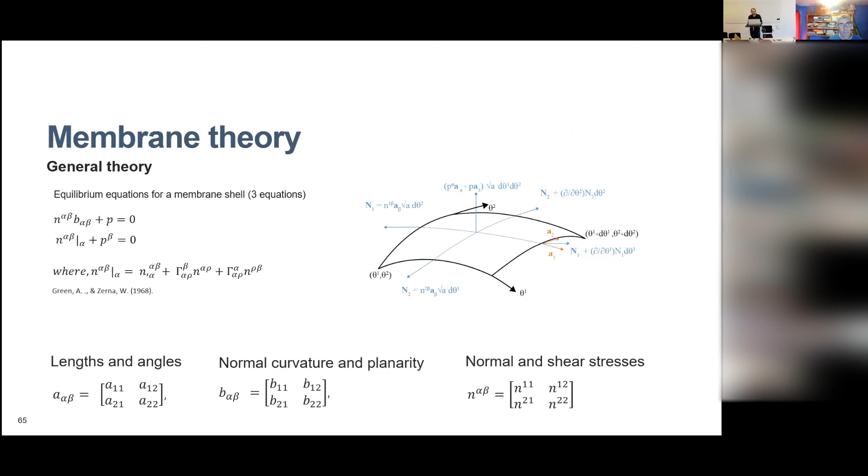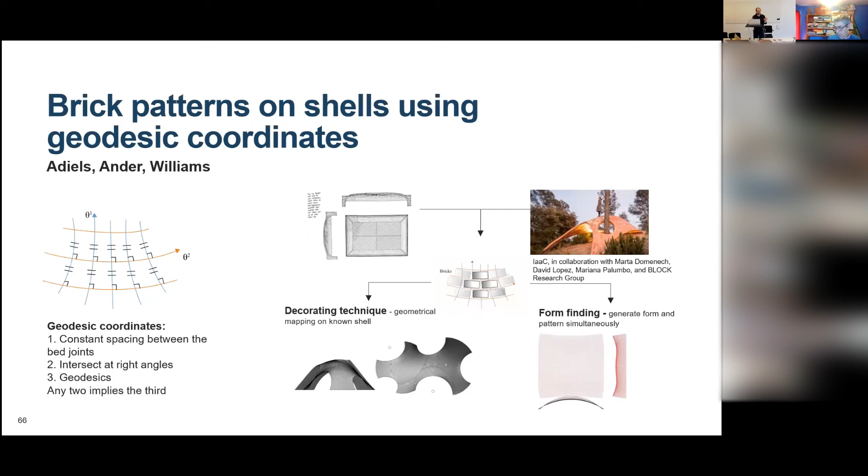So we basically combined that into two different techniques. One that was only looking at the geodesic coordinate system, which has these kind of properties, and we used to do the decorating technique, as I call it, where you can apply different types of patterns which is more geometrical. And then form finding, where you generate the form and the pattern simultaneously, since we know about the membrane theory connection.

And then something we've done is also looking at something called a special type surface, where all the points on the surface actually have what's called constant solid angle.

I probably don't have very much time for this, but basically if you took a curve and projected it onto a unit sphere, you get this image, an area.

Imagine you have a point cloud with a bunch of points, and all of these points will have the same constant solid angle.

So we use the Gauss-Bonnet theorem and also the Biot-Savart law -- the Gauss-Bonnet to calculate solid angle, and the Biot-Savart law to understand what direction to move our points.

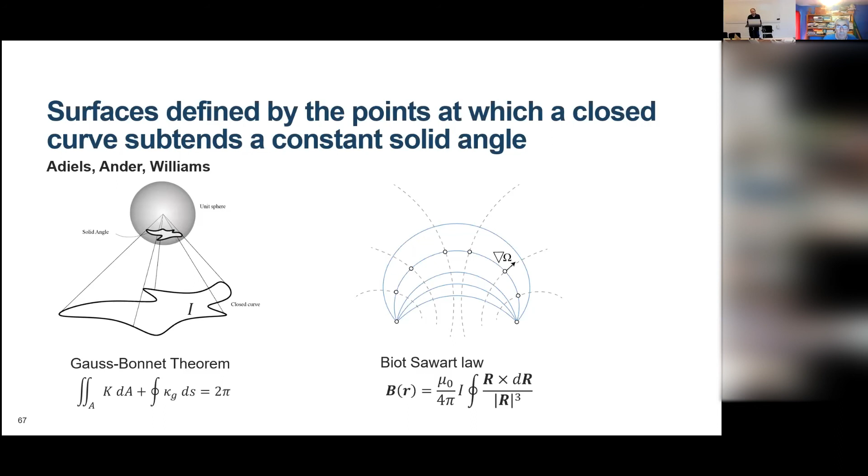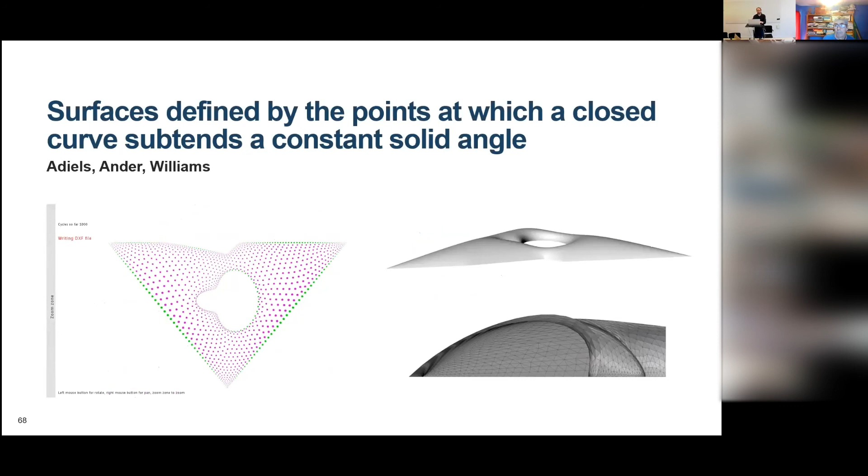The good thing about that is you can get the same sort of slope around the boundary, which is usually a problem when you're working with patterns. So then you could potentially make a principal curvature net since the slope is the same around.

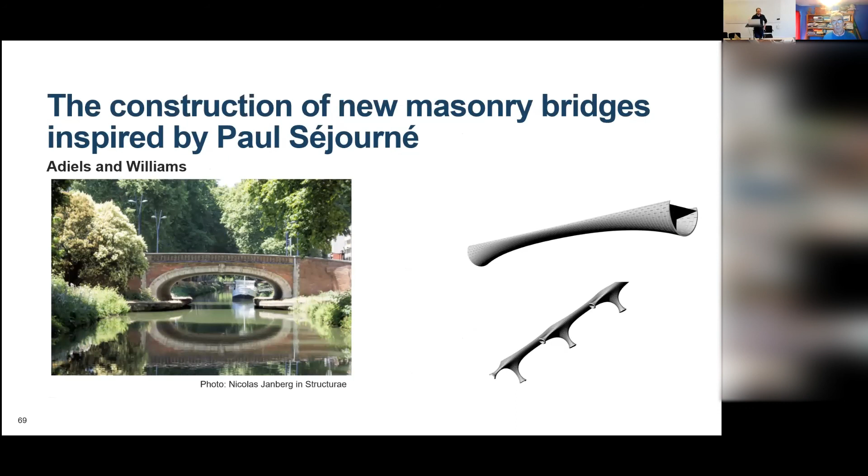We also looked a bit at masonry bridges, to see if we could reintroduce these masonry bridges, because in the UK you have a lot of masonry bridges that are still used even after a long time. So we tried to find a way to see if we could use them, because a large part of a masonry bridge is actually soil.

So it's basically like a container in a sense for the soil. We thought to see if we can make a form finding procedure, which is basically a hydrostatic shell, you could say, where the load is mainly based on the soil pressure.

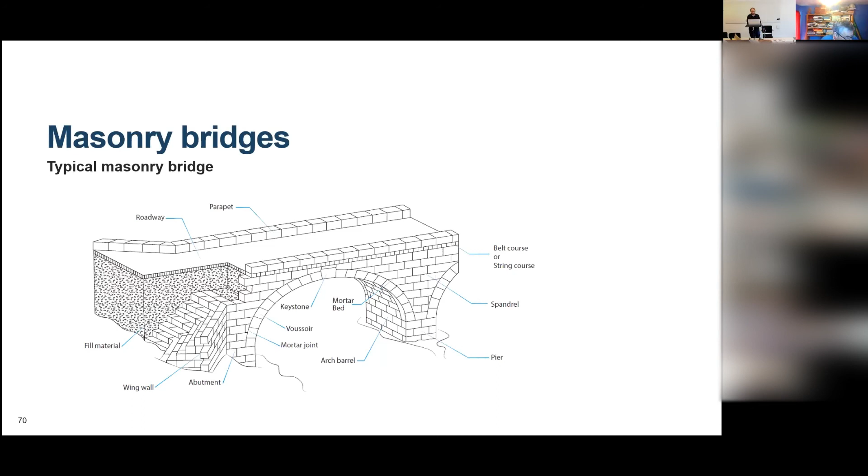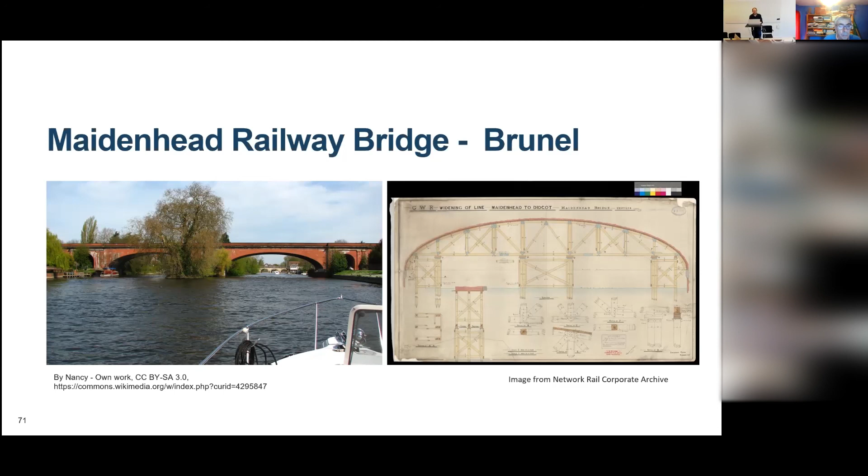You can see this in, for instance, the Maidenhead railway bridge, where the form of these arches is actually not really a catenary, which you would imagine if it was only gravity. You can see near the edges of this arch how it actually starts to have this added curvature.

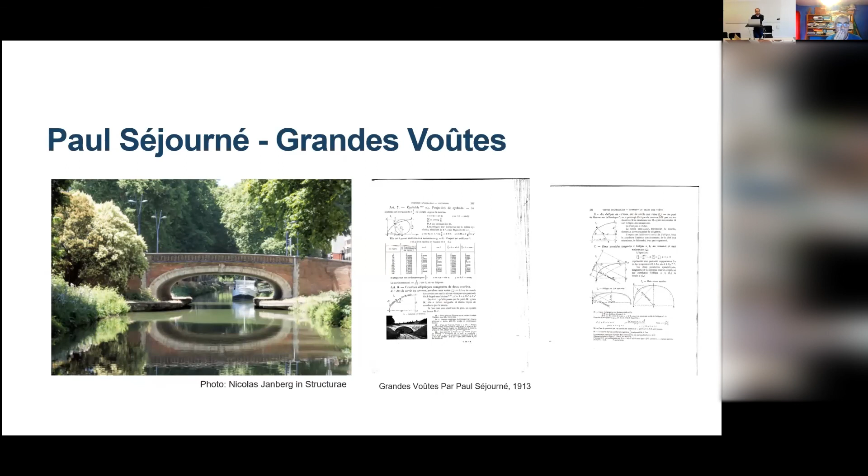So we looked a bit at this French engineer who built masonry bridges in the early 20th century. And then we formulated...

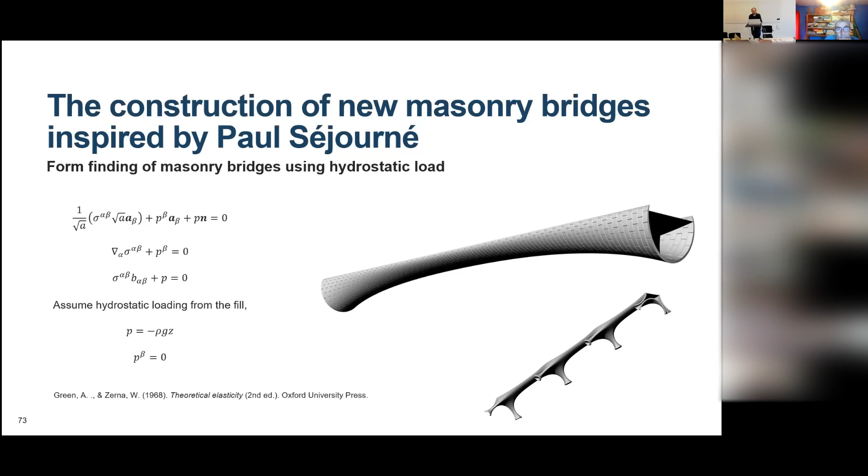So if you found any of this interesting -- sorry if I've extended the time here -- you can always look at these videos on my Vimeo, or as Allan said, read my licentiate thesis if you want to know more, or check our homepage. So thank you so much for listening.

Thanks, Emil. Absolutely brilliant. Really good.